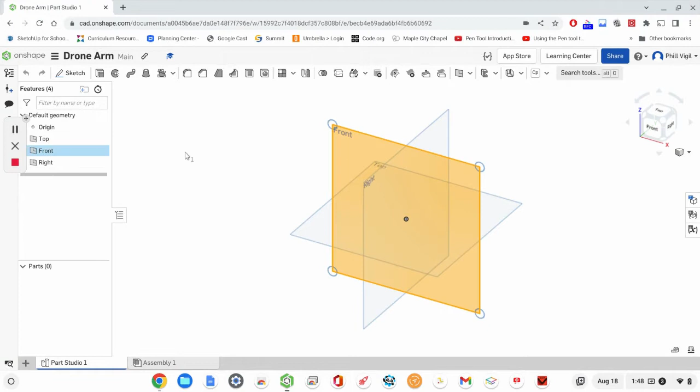So to get started, we're going to start a sketch on the front plane. You can either select that first and then click Start a Sketch, or you can select to start a sketch and then choose the front plane. Then we're going to view normal to the sketch plane by right-clicking and selecting View Normal to Sketch Plane. Then press the P key to hide all of the other planes.

Now we're ready to sketch. Our instructions are saying to sketch a 2-point spline on the front plane. Be sure the right endpoint is vertical to the origin, so we want to anchor one side of our line to vertical of this point of origin.

So I'm going to start a spline, make sure that I reference that point and drag up. I get that yellow dotted line, which means it will be vertically aligned with that. So I'm going to click there, and then it's going to be slightly above what would be horizontal to that, so it's not horizontally aligned, slightly above that. So I'm going to go ahead and click over here. I'm done with my spline, it's just a 2-point spline. So I'm going to click Escape.

Eventually this needs to be curved, so I'm going to force some things to happen by creating some construction lines. On each end, I'm going to start a construction line. I have construction enabled, and then I'm going to start a line at each endpoint. The length doesn't really matter. Go ahead and do that again from the other point out.

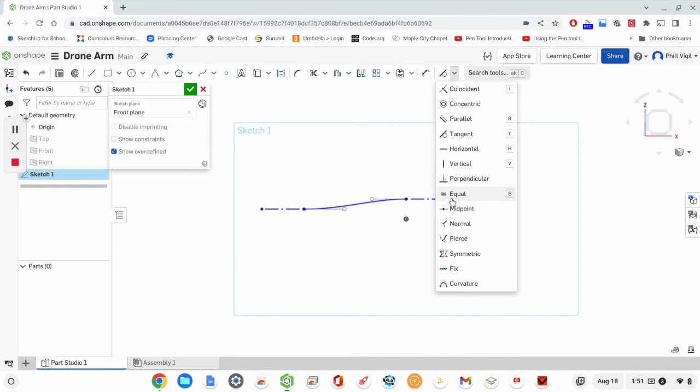The other thing we're going to do is make sure that these two handles are the same length, same distance from the end point. So I'm going to escape to get out of my constraint tool, and if I grab and drag one of these, you can see only one side adjusts. So I want these two to be equal, so I'm going to use the equal constraint and click on each of the handles. Now if I escape out of the tool and grab one handle, both of them adjust the same.

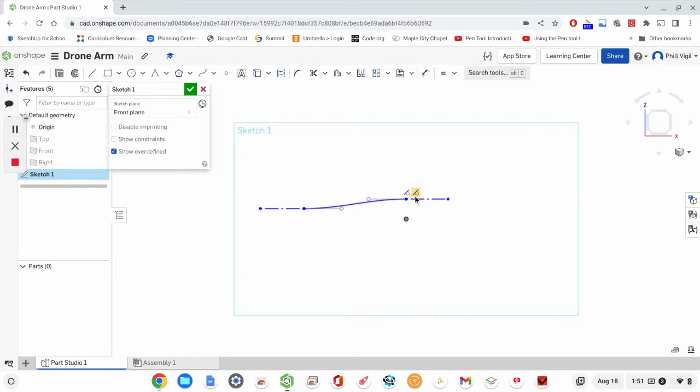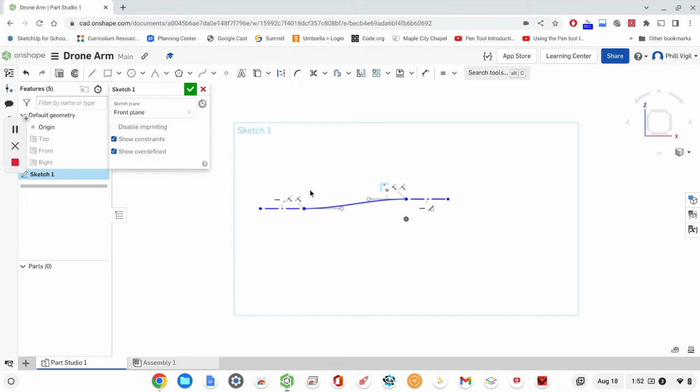All right, so we've done that. We need to ensure that the spline is tangent to each construction line, which we've already done. You can see once I reference a line, all the constraints appearing. If you want to see all of the constraints, you can click Show Constraints and enable that. If you don't see all of the constraints you're expecting, it may be that you're zoomed out too far, so they start to overlap. If you zoom in, you can see all the current constraints.

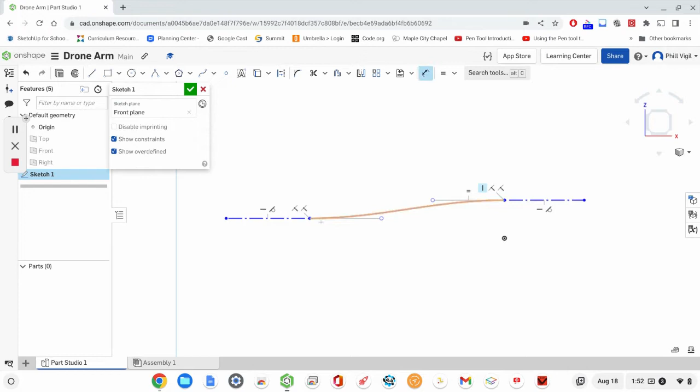Now we're going to add some dimensions. So we want the length of the handle, each of these is going to be 45, and we're modeling in millimeters. Then we want the distance from this point to this point, so I'm going to reference both of those points. I need to drag it out this way in order to reference the height difference. That's going to be 15.

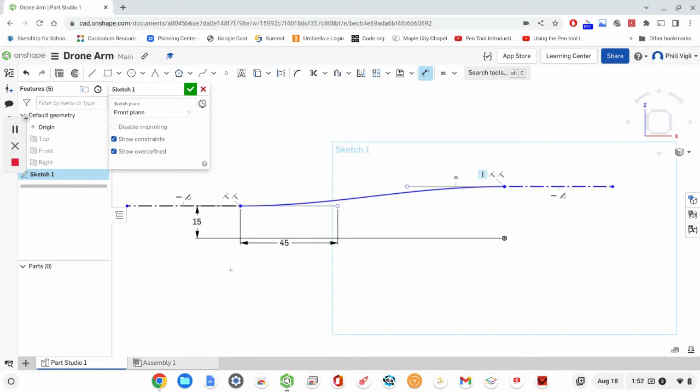Then I have a height measurement from the point of origin to that end point, which is supposed to be 25. And then the total length from end to end of our spline is going to be 125.

All right, so all dimensions and points have been defined, so the sketch is completely defined, which means everything has turned black. So they're all codependent - if you changed one thing, it might interfere with one of these and it will not work, so it's kind of locked into position. You can still adjust things like the length, things that are independent of one another. So for now, we're done.

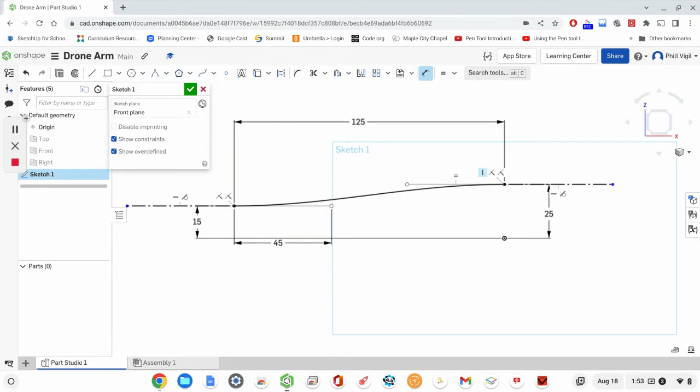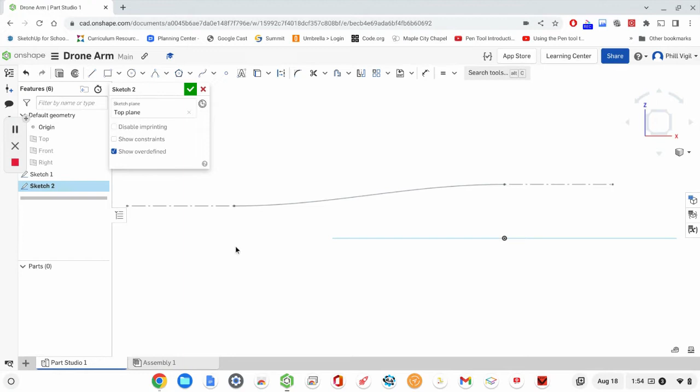Click that check mark. The next thing we're going to do is start a very similar sketch, but on a different plane, so go ahead and click on the sketch button. This time we're going to start on the top plane. So I selected the top plane, and then I want to view normal to that plane because I'm still viewing from the front, so I'm going to right click and view normal to sketch plane.

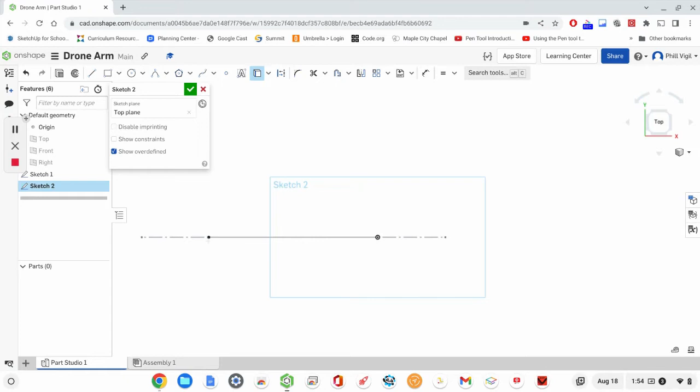Now from here, we're going to create a very similar spline, but we need to reference this point in our other drawing. So before I start drawing, I'm going to use the Use tool and click on that point, and it makes it available in my sketch as I'm drawing. I can reference that point.

Now we're going to create another spline, so go ahead and select the Spline tool. We want to be sure the right endpoint is vertical to the origin, so again we want to reference the origin, and it's going to be this time below that point. So I'm going to reference that yellow dotted line, drag it down slightly, and then click to start my spline.

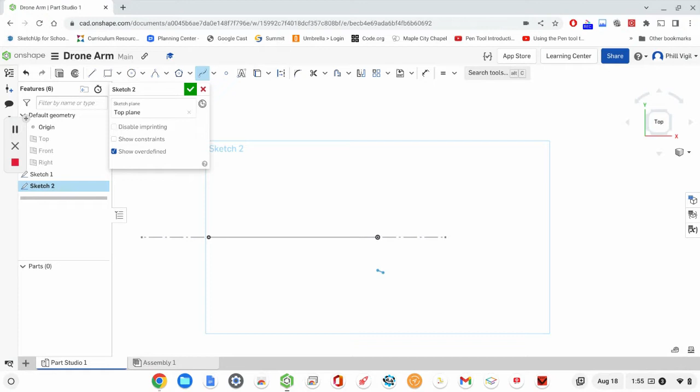And then I want to reference the end point that I made available from the other drawing. That's going to be below that slightly, not as low as the other one. So I'm going to click here to end that.

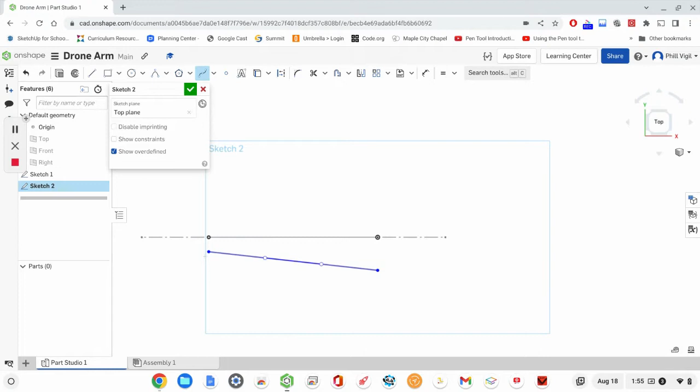And now I'm going to press escape. I'm done drawing my spline. Right now it just shows as a straight line because the handles are straight, so I'm going to go ahead and just drag those handles up.

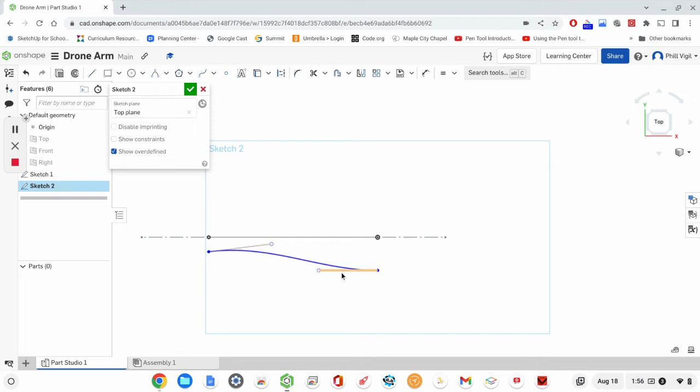I'm pressing escape to get out of the tool. I want to be able to see the handle and select it, so I'm just dragging it away from the spline for now. And I want these both to be horizontally aligned, so the handle is horizontal. I'm going to add a constraint, horizontal, to each of these lines, or the handles.

So they should be — go ahead and show constraints to make sure we have a horizontal constraint on both of these. All right, just want to make sure there's no other issue.

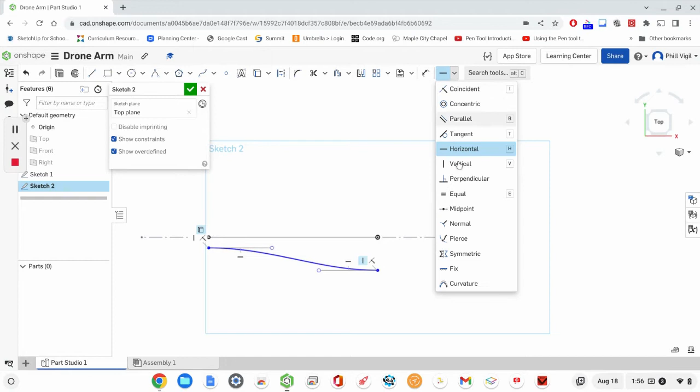Okay, so now we're going to add a dimension. These two handles again should be equal, so we're going to add that constraint really quickly. And then we're going to dimension, starting with the handle. It's supposed to be 45.

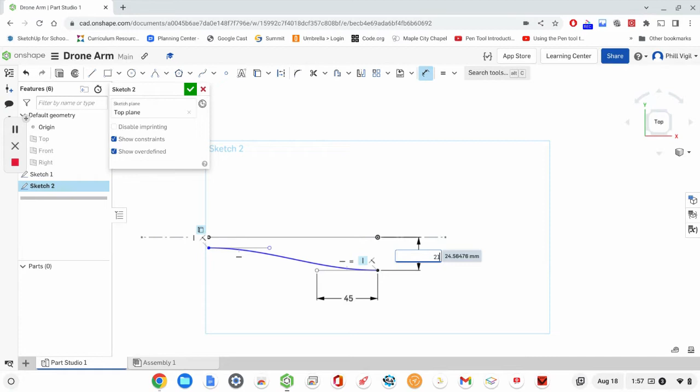And then the distance between the point of origin and this end point here should be 21.5. And then from the other end point, this measurement should be 15.

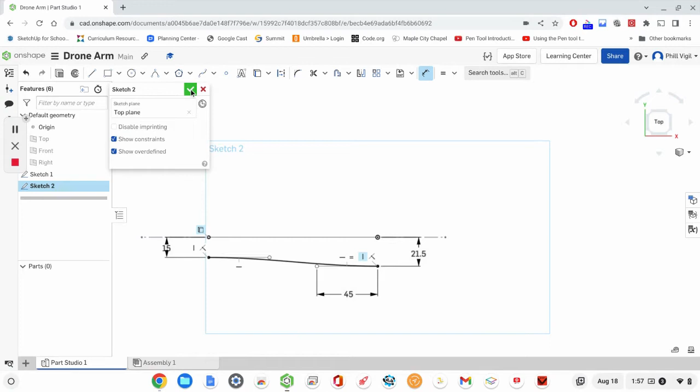All right, now everything is well defined here, and we're ready to accept this as our second sketch. So click that check mark.

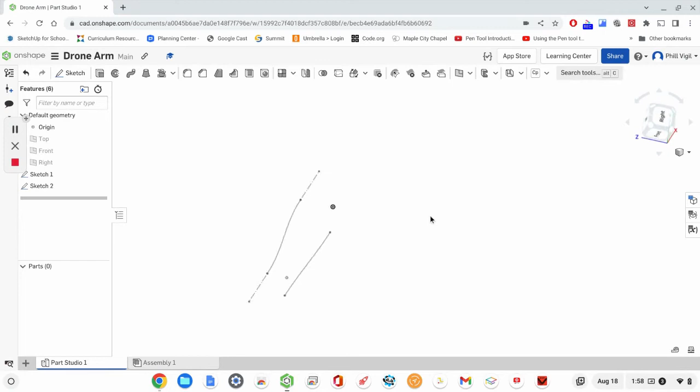All right, in this next step, I'm going to go ahead and orbit so we can see both of our lines here. So what I'm going to do is loft the two together. Let's see if I can view slightly from the top. Let's get this view here.

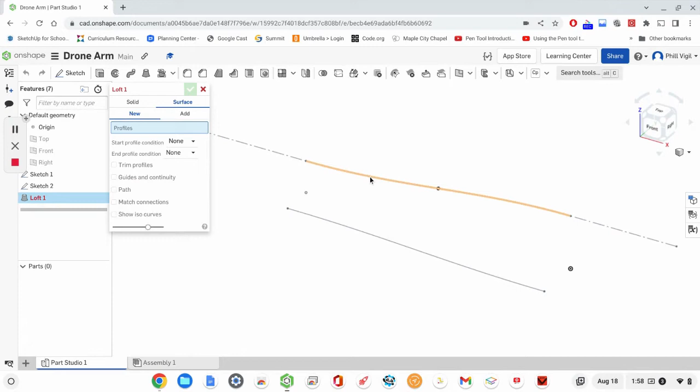So we're going to loft to create a surface between the two lines. Each line will define the ending edge of a surface. So find the loft tool, and we're going to select the profiles of each edge. Click on edge of sketch 1, edge of sketch 2. Automatically you see it's bridged the two, created a surface between them.

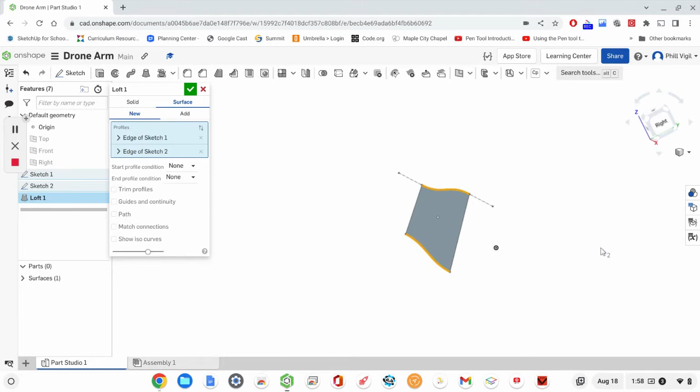But it's just a straight, flat surface. I want this to be curved. So we're going to create a condition for the starting point of each end of our surface. I want to do normal to profile.

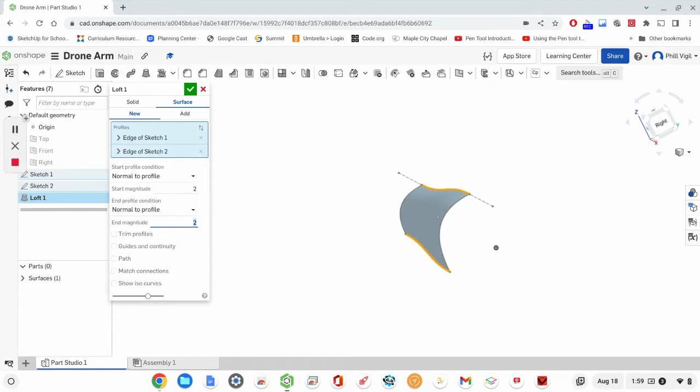So it's going to bend out slightly, trying to match the end with the profile of that line. I want to do that to both the start and the end, and I'm going to change both of the values here to 2 instead of 1. Once you apply that setting, you'll see it drastically affects the curve. Then click the check mark to accept that.

So this is really one quarter of what would be a completed part. We're going to mirror this on the other side, which will complete half of our part surface.

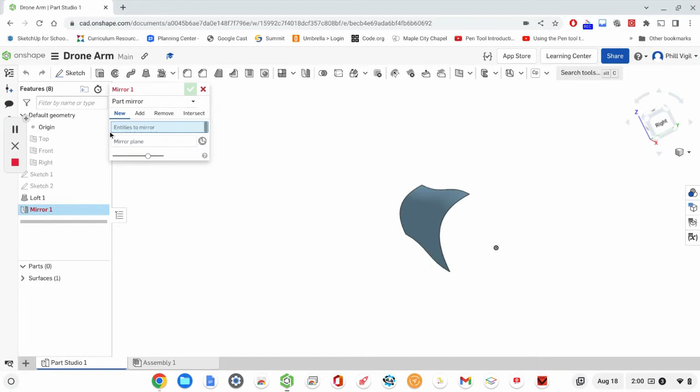So we're going to find the mirror tool, which is up here. And then it says in the dialog box here, entities to mirror. So I'm going to select the surface that I've created, and I want to add it. And we're going to select the mirror plane.

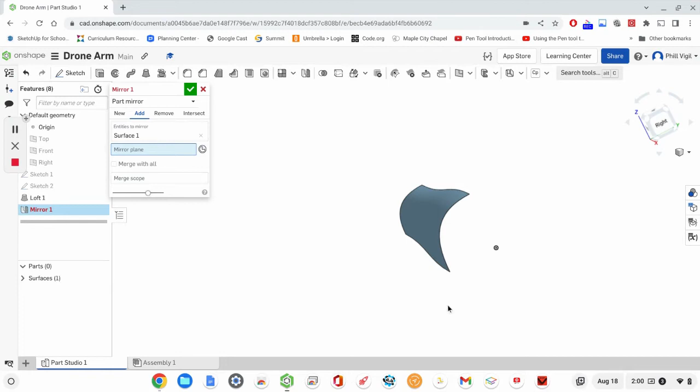And we're going to use the top plane. So if I reveal the top plane, you can see that is a plane. If I mirror on the other side, that will give us what we want. So we're going to choose the top plane as our mirror plane.

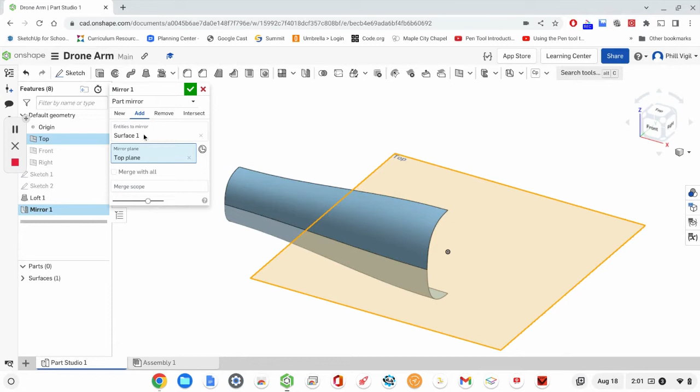All right, so since those two are touching, it's going to merge our original surface with the new surface, and it's going to create just the one surface. It will still reference both halves if I scroll over it, but it's really only one surface. If I hide it, the whole thing disappears.

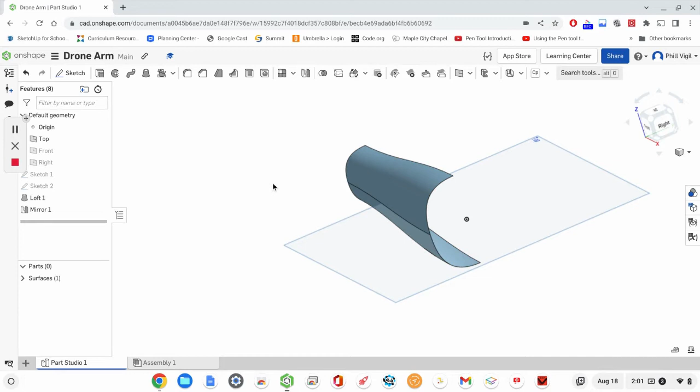All right, now we're going to move on to the other part of the arm. So I'm going to hide the surfaces. We're going to start a new sketch, so click on the sketch button. And we're going to choose the front plane as our sketch plane. Right click and view normal to sketch plane. So this is the plane that we're sketching on.

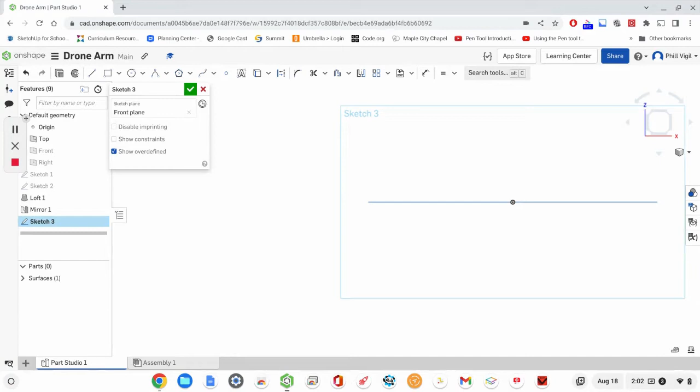Now we're going to sketch a vertical construction line to the left of the spline in sketch 1. We need to show sketch 1 in order to know where to put this, so I'm going to click on the eyeball next to sketch 1 to make it visible, and I'm going to be sketching a construction line to the left of the spline, so somewhere over here.

I'm going to choose the construction option, and then the line tool. I'm not sure exactly the position or the length yet, but I'm going to create a line that crosses about right there. Press escape.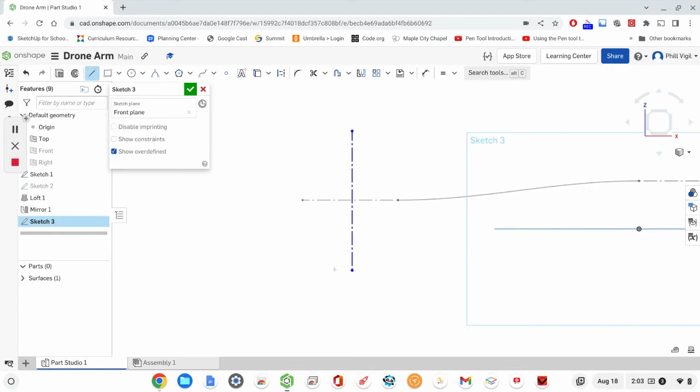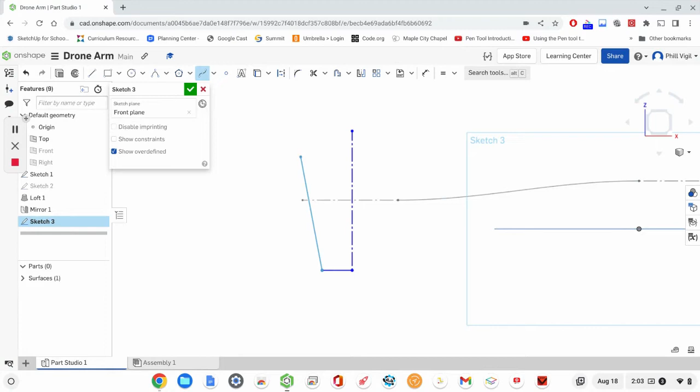Then we have a profile that we're going to be sketching using a few different tools. We're going to start off with a small horizontally constrained line, and to that we're going to add a 2-point spline. I'm going to click here for the spline tool, attach it to the end of my horizontal line, and then move up here to place my second point about right here. Now I'm done, so I'm going to press escape.

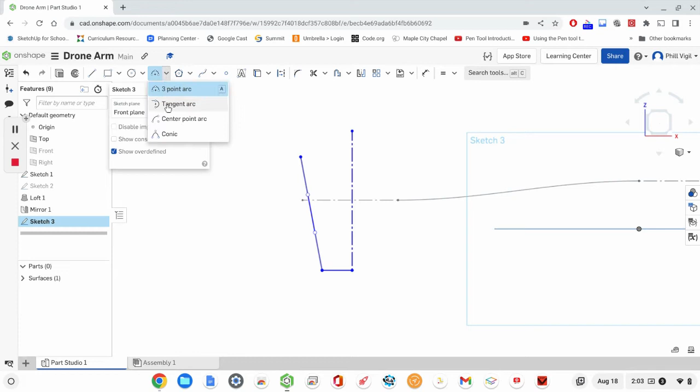Then I'm going to use a conic arc. If yours is set to 3-point arc, go ahead and click that arrow. We're going to choose conic from the menu, and then I'm going to click at the end of my spline to start it. You can see this is an interesting tool here.

I'm not going to attach it to the end point of my construction line, but I'm going to reference it vertically before I click. So it's not going to be attached, it's a little distance away. So then click to place that.

Then the RHO dimension is supposed to be 0.5, so we're just leaving it like that. But then I'm going to drag it to where it's also horizontally aligned - I may have said vertically, but it is horizontally aligned with that point. All right, we're going to leave that as 0.5. Press enter to accept it.

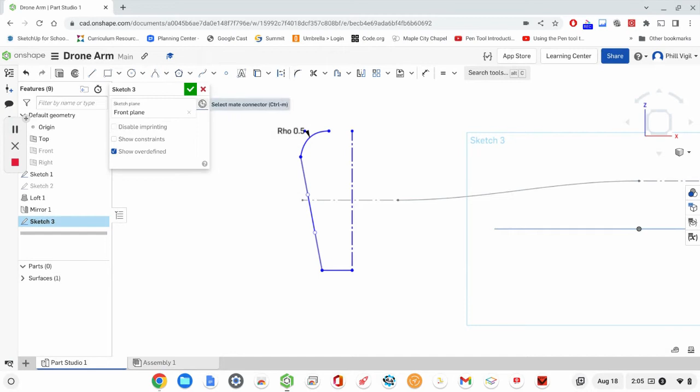Now we need to add a bunch of constraints to make sure this is going to turn out the way we want it to. The first one we're going to do is add a tangent constraint between - let's go ahead and escape out of this tool here. Let's go ahead and add, this is supposed to be horizontally aligned. Let's go ahead and do that. Then we're going to add a tangent constraint between this line and our spline.

Now I'm going to go ahead and grab the other handle, so I need to get out of the constraints. Drag this over here. And then this is supposed to be also - let me go ahead and shorten this because I'm looking at what I'm supposed to be creating here and it's not quite right. So I'm going to drag that in so that this can be vertically constrained.

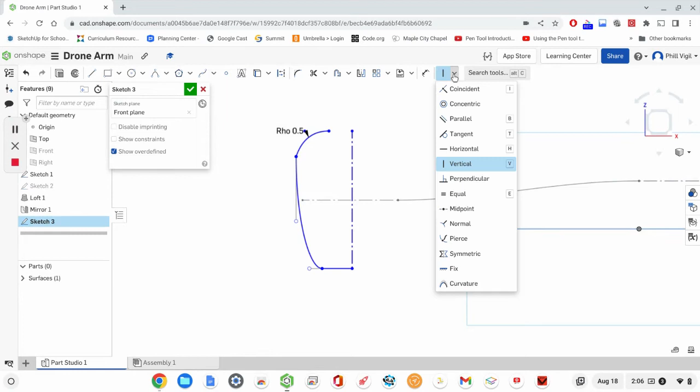And then also this line should be tangent to that, the conic. So we're going to do a tangent reference between this and this. Just checking to make sure I have all of the constraints correct. Again, if you want to view, I'll go ahead and show my constraints and see if you have the same.

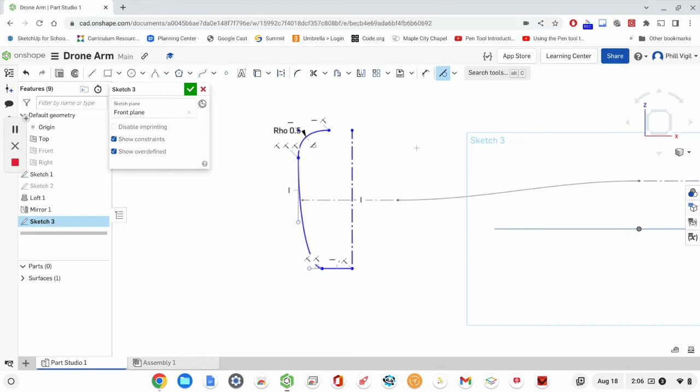So these 2 points are horizontally constrained, and also this point is horizontally constrained with that endpoint. We have a vertical constraint on this handle, and then a horizontal constraint on this handle, and then a tangent relationship between the spline and this line, our horizontal line, and also the conic curve there.

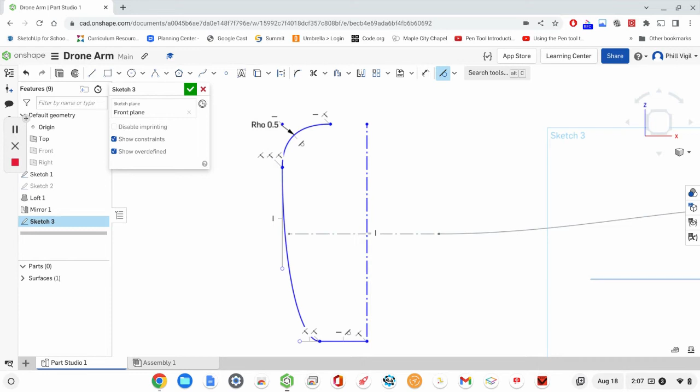Next, we're going to add all of our dimensions, which will lock it into place. I'm going to start with the base here, and this is going to be referenced as a radius, not a distance, so this is going to have a radius of 15 millimeters. I'm going to go ahead and click on the dimension tool. If you want to make a radius, you click on the point, then reference the line that would be the center. That creates a radius instead of a distance between this point and the center point, so it's projecting a circle. That's supposed to be 15 millimeters.

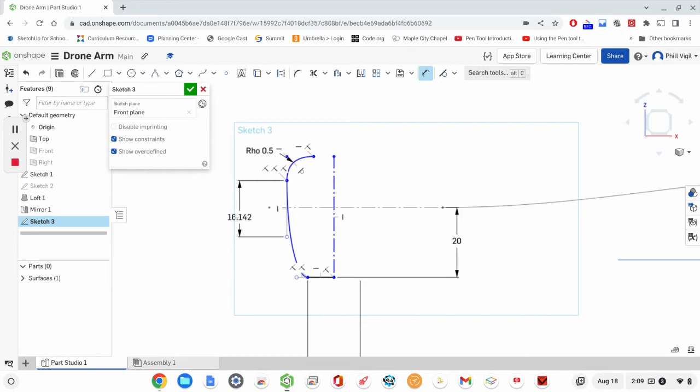Now the distance between this point and this point should be 20 millimeters. Go ahead and reference those 2 points. And then we'll continue up - this is supposed to be the distance between the end point and the handle, and it's supposed to be 30 millimeters.

And that really squished things up here at the top. Let me undo that step. So as you're doing this, if you ever run into that problem where it really distorts your drawing too much, then you might need to start with a different dimension. So I have this dimension placed, but I'm not going to change it now.

Let's go ahead and stretch out the length here, so I need more length to work with. So another measurement would be - it's 10 millimeters between, let's go ahead and start at the top here.

All right, let's do this. There's 10 millimeters between the top of this point and this point. Let's go ahead and reference that. Type in 10.

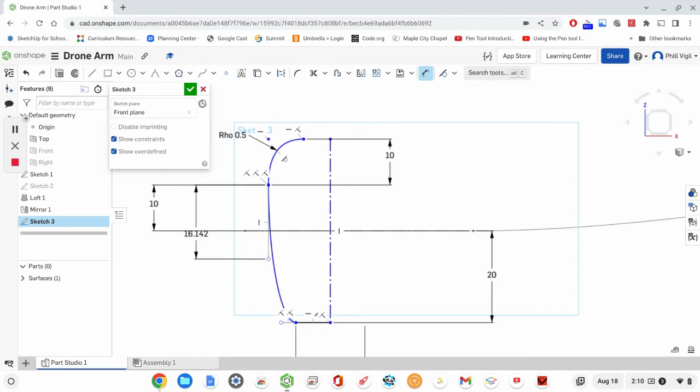And then there's 10 millimeters between this point and the end of our spline over here. And then there's a 10 millimeter distance between this point and our construction line.

All right, now the dimension between the top and our construction line is also a diameter value. So I'm going to click on the end point and then reference the line. That will give me a diameter that's supposed to be set to 15.

All right, now I can set this value here that I was struggling to be able to earlier. So I'm going to double click on that measurement now and type in 30.

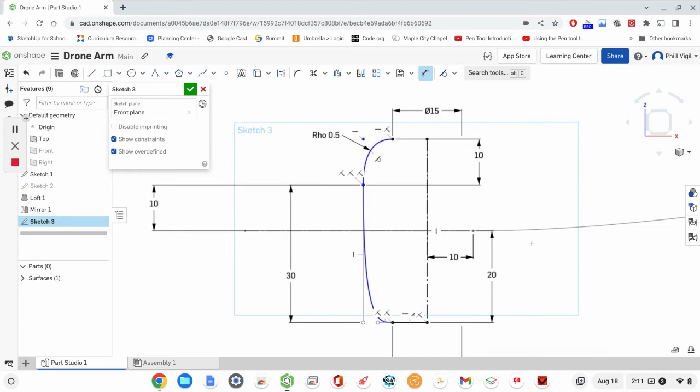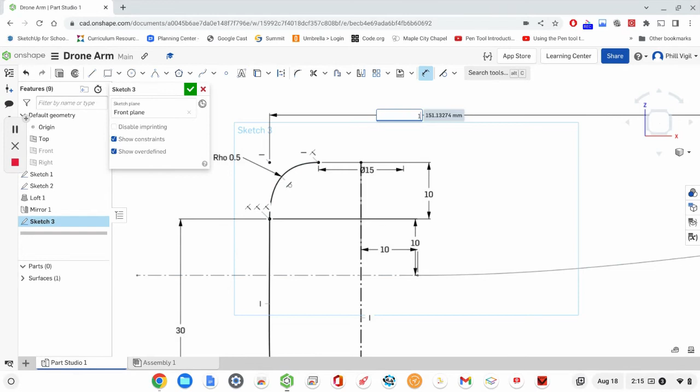I have one more measurement. So the distance between this point, the very end point—I can actually reference this point, and this point here—this is supposed to be 155. There we go.

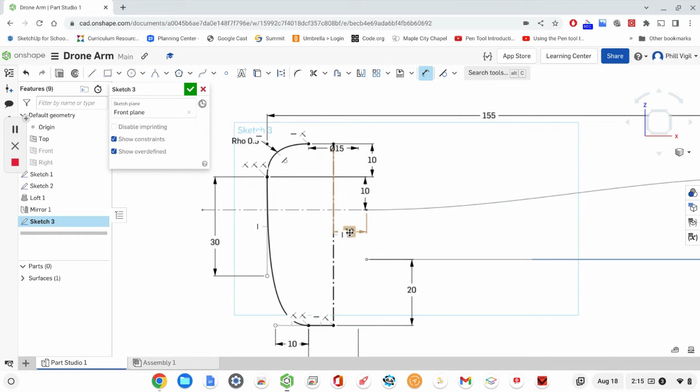That's a lot of dimensioning. So pause here if you need to reference all of these values. I'm just going to rearrange them so they look a little bit better. I'll turn off my constraints so that's not distracting there.

All right, the next step we're going to do is go ahead and check the check mark to accept the sketch as is. And we're going to revolve this profile around this center.

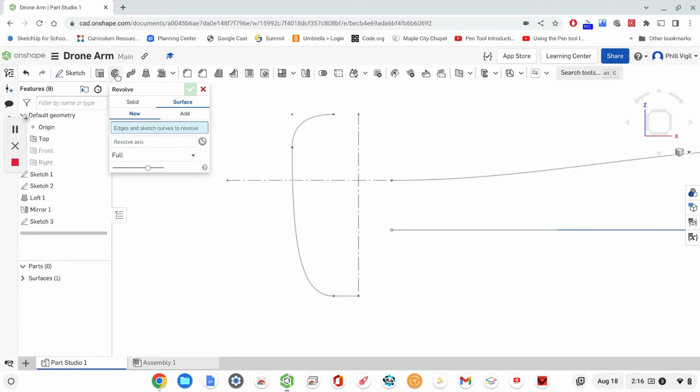So find that revolve tool, which is right here. We're going to select sketch 3 as our profile. And then we need to select the axis, so click on that red box and then choose the construction line as our revolution axis.

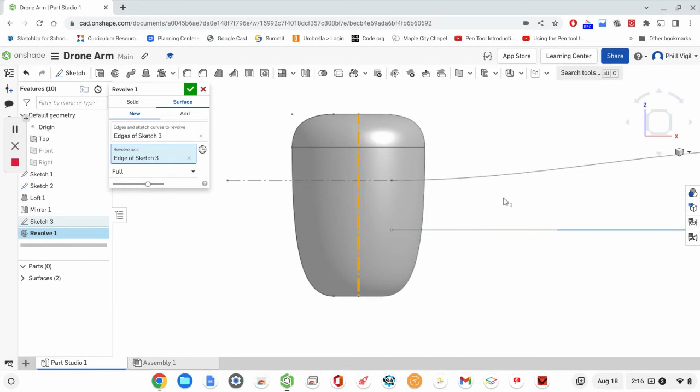And that completely revolved 360 degrees around because full is selected. We want to change that to one direction. And the degrees we want to do half, so 180.

All right, so if yours did not revolve this same way, you can simply click the arrow, find the revolve arrow, and click the end of it, and we'll reverse the revolve. So we want the revolve to be this direction. Once you're looking at the front, you should be seeing the outside of this surface.

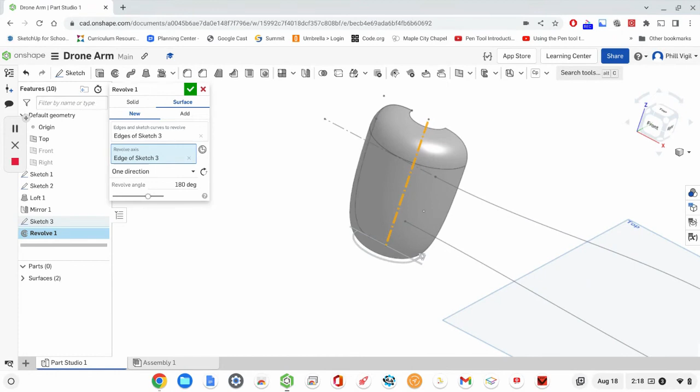All right, go ahead and click the check mark to accept the feature.

Now we're going to split. So we're going to reveal our surfaces. We have two of them. Go ahead and turn the other one on so you can see it. So you can see, if we orbit in, we can see that there's extra surface on each of our parts here that need to be trimmed away.

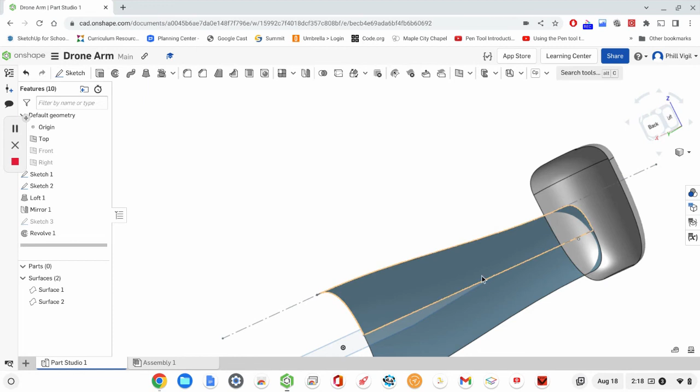Eventually we want this all to be one fluid surface. So we're going to use each surface to trim the other one. That process is called splitting. So find the split tool, and the first thing you want to select is a part or surface to split.

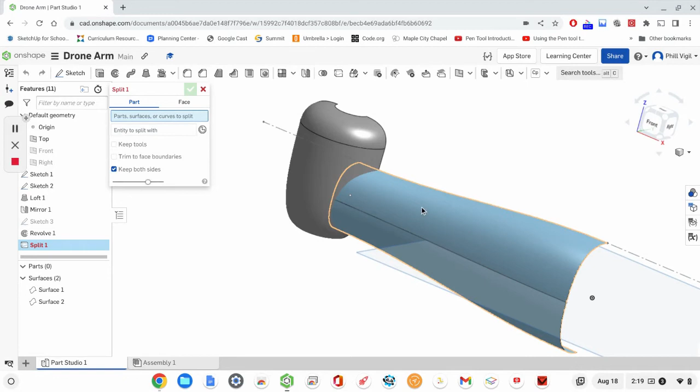So we're going to click to select, let's go ahead and do the arm first here, this part. And then the tool that you're going to select to split with is the other part. So I'm going to switch over to the entity to split with. We're going to use this part to split the other part.

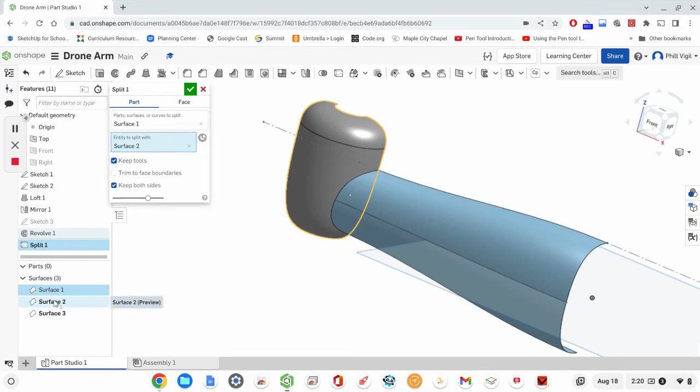You can see there's kind of a split line right there, and it has created another surface. So there's two surfaces, one here and one on the end, and our other surface, the one that we used, has turned kind of ghosty. We want to keep that, so we want to select Keep Tools. Otherwise it would disappear. So now we have three surfaces: the one that we used to split, and then the two surfaces that have been created when we actually did the split.

So we're going to go ahead and click the check mark. Now we've successfully split the one part that we need to split, and now we need to use one of the other surfaces to split the one that hasn't been trimmed yet.

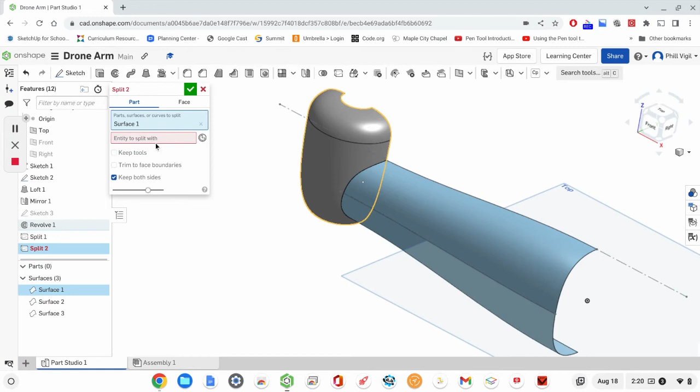So let's go ahead and select the split tool again. This time we're going to select this surface to split, and then the entity to split with. Choose that arm. We want to keep the tools.

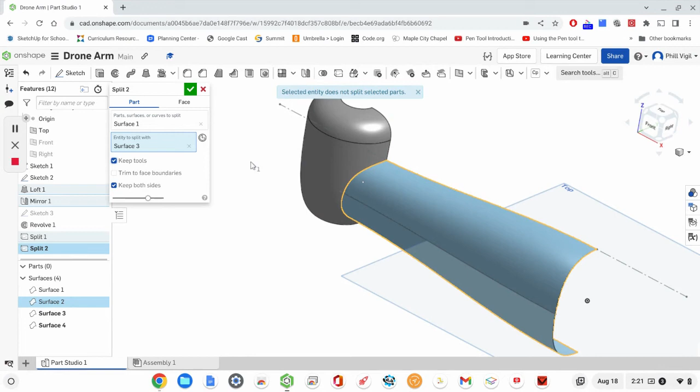And this warning here says selected entity does not split selected parts. It intersects it because we've already used it to split it. It's actually like attached right at the surface. So don't pay any attention to that, it's still going to work. So go ahead and click the check mark.

So you should have four surfaces now. Go ahead and orbit so you can see all four. So there's a surface on the inside, two surfaces that we need to basically get rid of. And to know which surface, you could go ahead and just toggle them off with the eyeball to see which surfaces you want to get rid of.

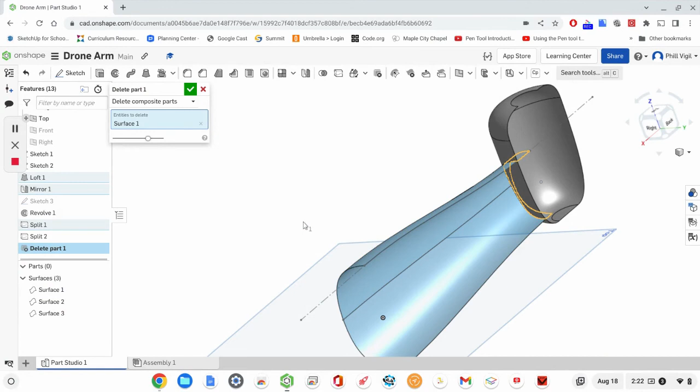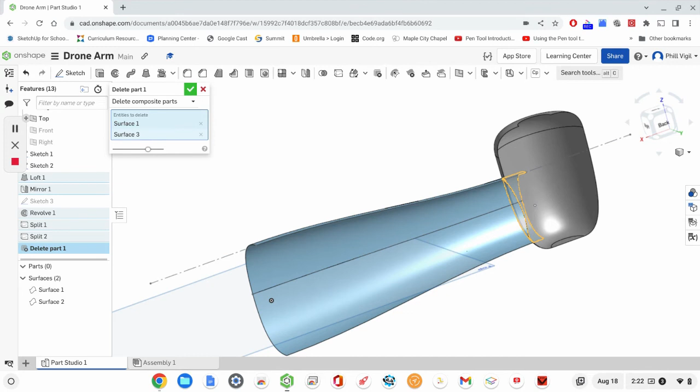So I want to get rid of 3 and 1, it looks like. Go ahead and enable all of the surfaces, and instead of hiding them, we're going to delete them using the delete part tool. I can simply select the ones I want to get rid of, so I want to get rid of part 1 or surface 1 — that changed the order of things, so be careful before you select something. I'm going to try to select 2 and see what happens. Yes, that is what I want to have happen. Click the check mark once you've selected the correct surfaces, and you should be left with this.

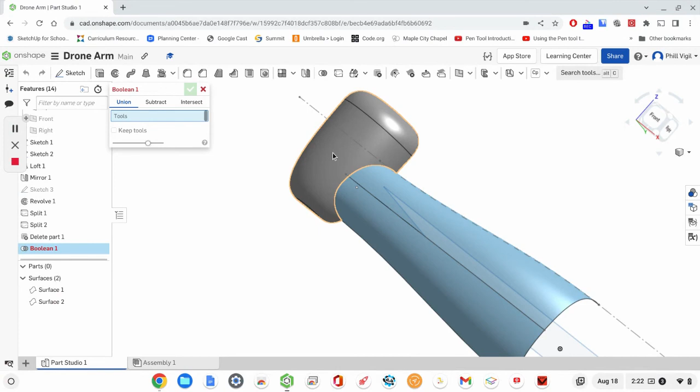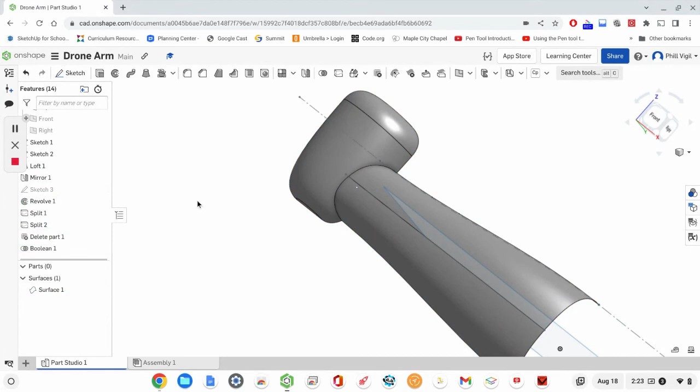The next step is to combine the two together to form one surface. We're going to use the Boolean tools. Click that. We're going to union these two together, then select the two. You do not need to select keep tools — that would be keeping the surfaces. So we're going to be creating a part which will actually be a surface. Let's go ahead and click the check mark. Now we've combined them into one surface.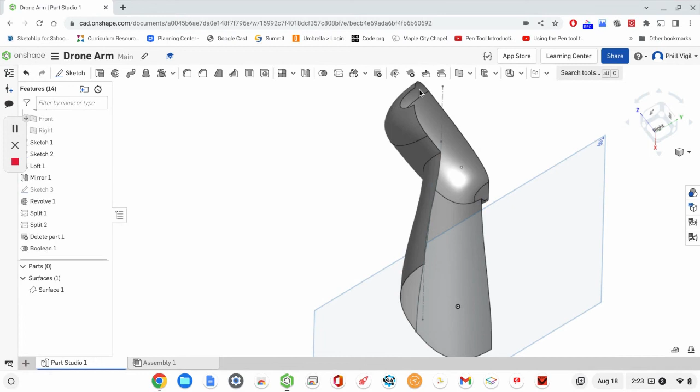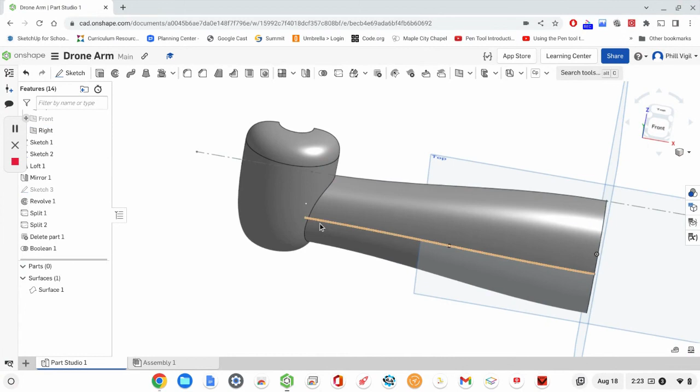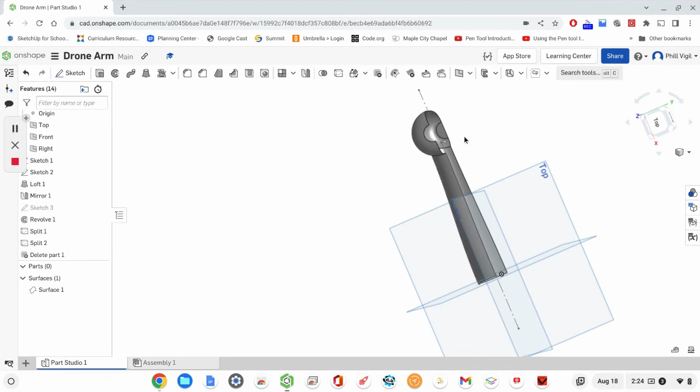Next we want to basically fill in all this space with solid material, but it's not an enclosed shape. We just have some surfaces that are open, so it's not watertight. We need to enclose it somehow, and we have a reference point to do this: the right plane. If I turn the right plane on, you can see that creates a barrier that can be used there. Then I can use another plane, the front plane, because it extends all the way through space. This plane could close in all of this, all the way through. But there's a section here that is not still closed in — that's at the very top, where this half circle is.

So I'm going to create a plane there that will cap this off. I'm going to use the plane tool and choose 3-point from the menu. I'm going to click the end point of that circle, well, it's like a half circle, then somewhere inside, anywhere along the line there, and then the other end point. Now I've created a plane that will basically cap off that part of my surface.

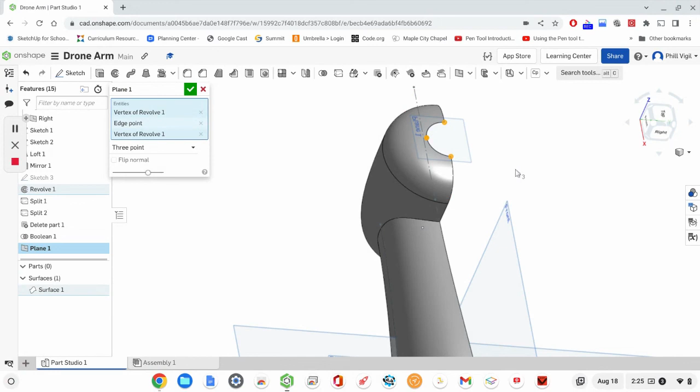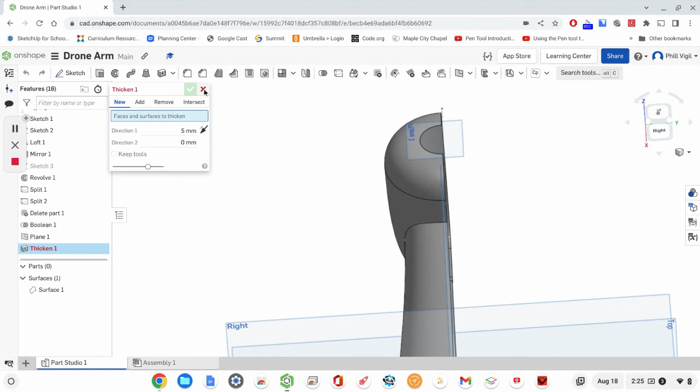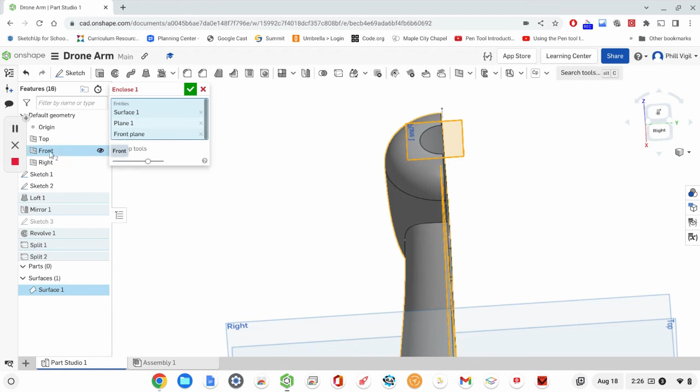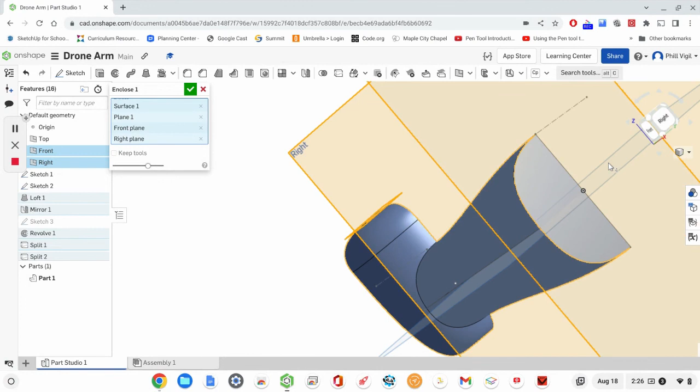Now I'm going to create a solid by using an enclose tool. If you do not see that, it's found where the thicken tool is. So go ahead and click on the arrow and choose enclose. Now I need to choose my entities — I'll need the surface, so I'll select that from the left. And I'm going to need 3 planes: the plane I created, then the other two, the front plane and the right plane. Once you have all of those selected, it should give you the option to select the check mark, and it will kind of imaginarily create some fill-in material there, indicating it's going to create a solid. Go ahead and click the check mark to accept that. And now as you orbit around, you can see it's completely filled in. Now it is a solid.

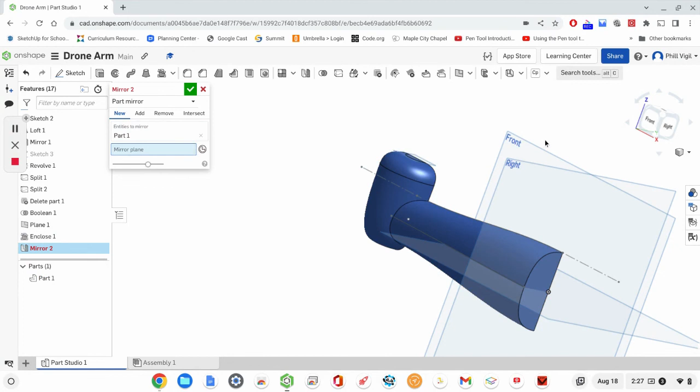All right, so we're going to mirror — this is just half, so I'm going to mirror this solid on the other side. Choose the mirror tool, choose your part, and then the mirror plane is going to be the front plane. That should create the other half. Make sure that you are adding that to part 1, and then click the check mark.

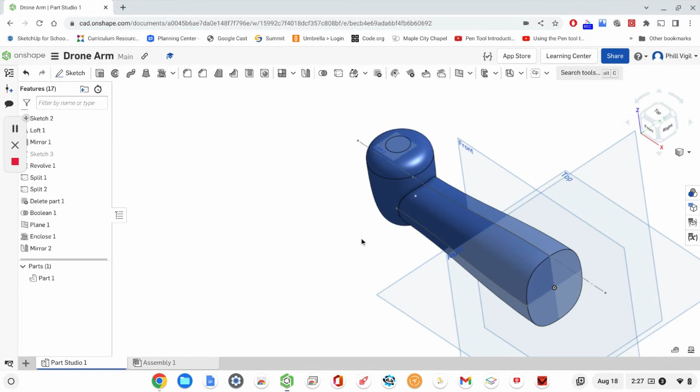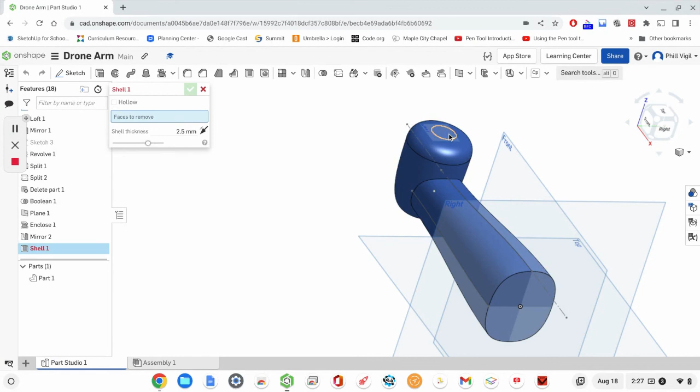Next we're going to create a hollow in this part and basically just keep the shell. We're going to use a tool called shell, so find the tool in the tool menu there and click it. We want to select the faces to remove — I want there to be a hollow here, eventually going to be a hole. And at the end of the arm here, I want that to also be hollow, so it creates empty space all the way through but retains a shell thickness. I want to set the shell thickness to 2 millimeters and then press the check mark.

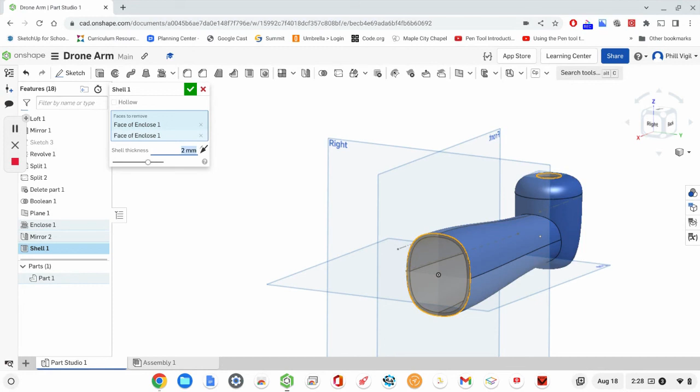I'm going to press the P key just to hide all my planes. Then if you want to, you can go ahead and hide the sketches so you can view your solid part. That concludes this exercise.